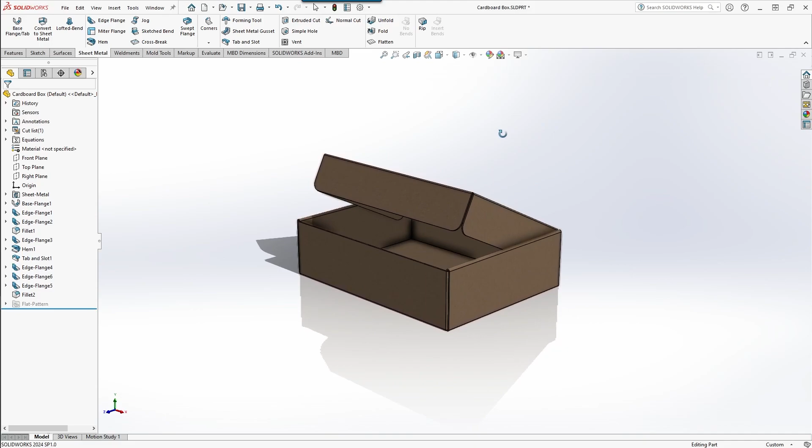As with any SolidWorks design, you have to start with your design intent. There are several definitions of what design intent is. In this case, I'm using design intent as the method of manufacture, to determine how we're going to design this box for manufacturing.

SolidWorks sheet metal feature allows you to flatten the pattern, and you can see exactly where I started. Everything stems from this rectangle right here. Now that's on this particular type of box.

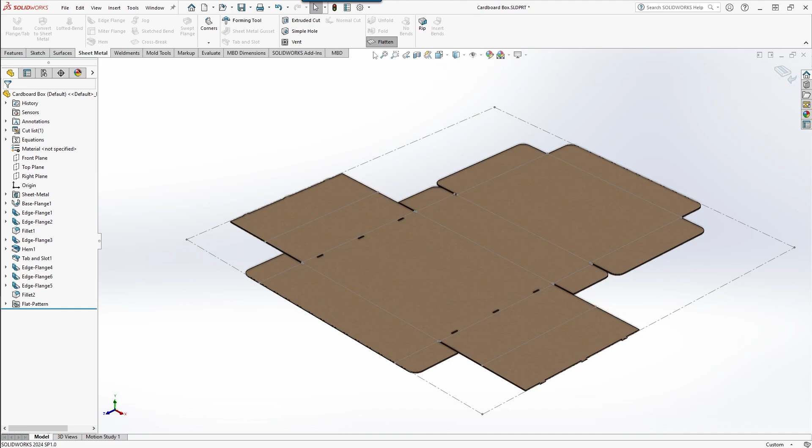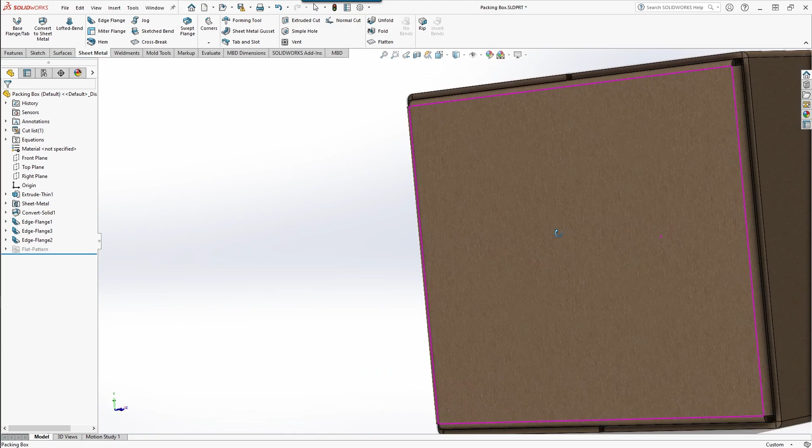On different cardboard boxes, there are obviously different ways for them to be manufactured. This box, when flattened out, doesn't start the same way because it's actually wrapped around, and this panel on this end is stapled over here to this piece. You can see that in the example here. When I turn this around, you can see where it folds in, and this normally gets stapled, with a couple staples on the side of the box. That can be for another video, but for this one we're going to be focusing on this box right here.

To start designing the cardboard box, the first thing we need is a base flange. In my case, I chose the top plane, and I started with this rectangular sketch.

After making the rectangular sketch, I went up to the Sheet Metal tab, clicked on Base Flange, and it gave me all of these extrusion features and sheet metal parameters. I overrode the default parameters and created my own, but these will be determined by your manufacturer or whoever the supplier is that's making the box, so you understand their box thicknesses and tolerances.

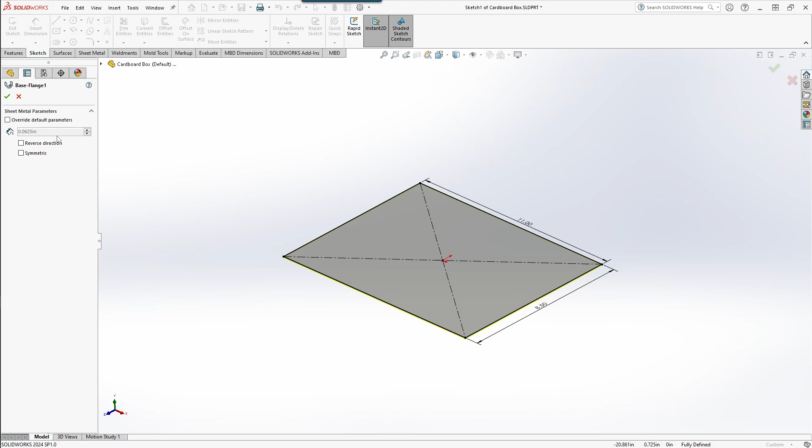After you create the base flange and it's extruded, you officially made your part into a sheet metal piece, and this gives you the ability to flatten it like I did at the end of the intro. After this is where we begin to create all of the flanges that come out from this base flange.

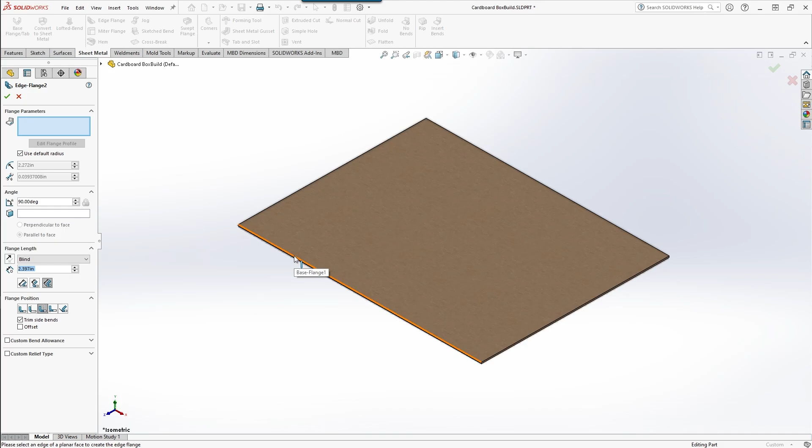The next step after creating the base flange is to create the edge flanges coming off of the side of the box. To do that, we go to Edge Flange under the Sheet Metal tab, select one of the sides, and choose the direction we want that flange to go in.

Now, as you can see, the bend on this is kind of ridiculous, so we're going to uncheck Use Default Radius and click 60 thousandths. Let's take a look at this down here. I'm going to hit Control 4 so we can get a better look at what these options actually do.

With the flange parameters, we have a couple of options here. First, I want to go to flange length because I want to adjust that to 3 inches. Now I'm going to zoom in a little here. Pay attention to the top of this. This will show us how the length of this flange is determined.

For the first option, it's going to determine the 3-inch length from a line drawn from the bottom here to an intersecting line to the outside of the actual flange, so that's what determines the 3 inches. Otherwise, if you click the central one, which I usually use, it's the 3 inches from the top of the radius we specified. And on the last one, it's from a tangent line.

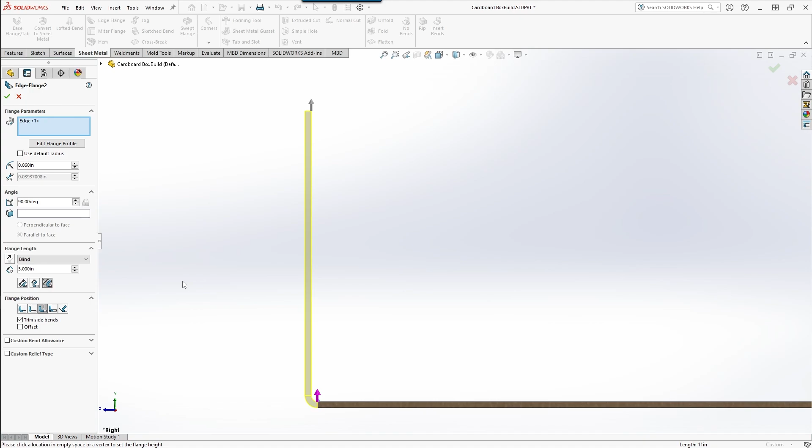This is handy when it comes to having angles greater than 90 degrees. Anytime you have a bend greater than 90 degrees, there's basically going to be a tangent line drawn along this curve, and that line is going to be perpendicular to this edge flange. The length is going to be from the top of this to wherever that imaginary line stems from on that tangent.

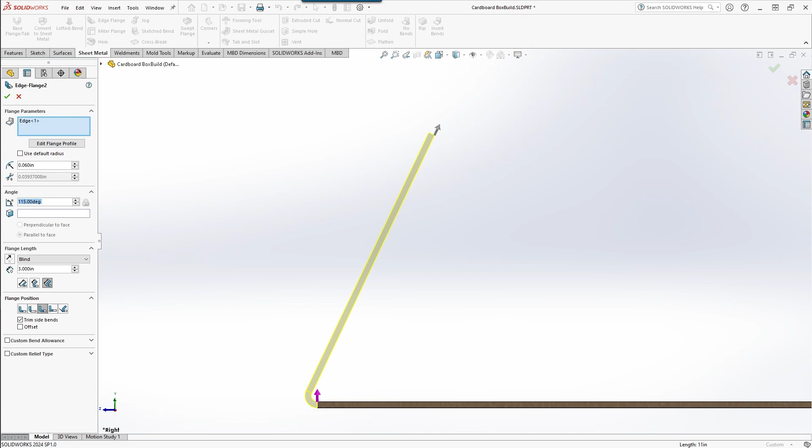Okay, so I'm going to go ahead and set this back to 90 degrees so we can start talking flange position. As you can see here, there's different areas that the flange can be positioned off of this base flange. I'm going to go left to right and explain what they are, except this one because I don't use it for this particular command.

So the first one is going to be the outside of the flange lines up to the base flange, which cuts into your base flange. The second option is to have the inside of that flange line up to the outside of the base flange, which also cuts into it. For our use here, I'm going to use the outside, which is the base flange is attached to the outer radius that we specified earlier.

Again, there's also the tangent radius to bend, which is the one that if you are using a bend that's greater than 90 degrees, it's going to create that tangent line, and that's going to help you determine the position of your actual flange. So in our case, I'm using both the radius and the flange.

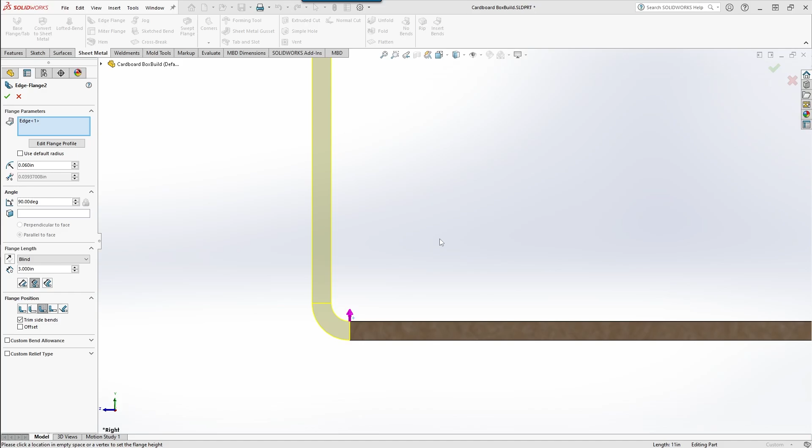Okay, so the next thing that we have to do is we have to apply this to the other 4 sides. So we'll go ahead and hit Control 7, which puts us in isometric view. Then we're going to go back up here and select the remaining edges. Since we already specified 3 inches earlier, all of these are going to be the same length. Go ahead and execute. And there you go. We have 4 flanges for the box.

Okay, so the next step is going to be to add some reinforcement flanges to the inside of the box. And what we're going to do is we're going to go back up to the edge flange again. We're going to go ahead and click an edge, point the direction. As we can see, the same thing happened with the radius, so we'll go ahead and click off default radius, add the radius we think is going to work, and then this is a point that's going to be able to display the inside-outside tangent bends that we talked about earlier.

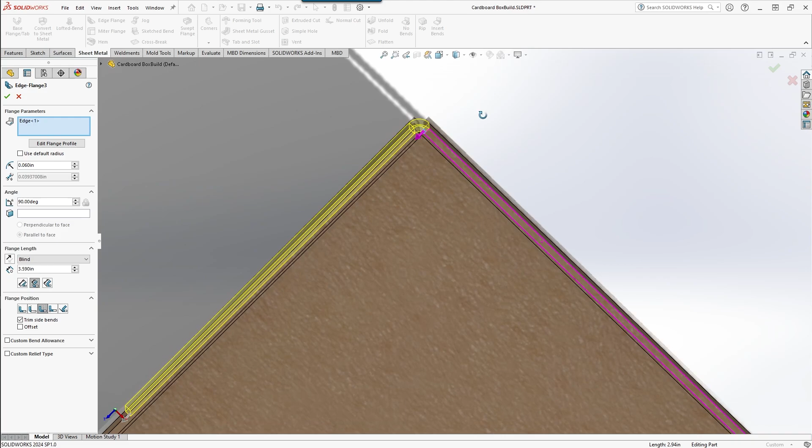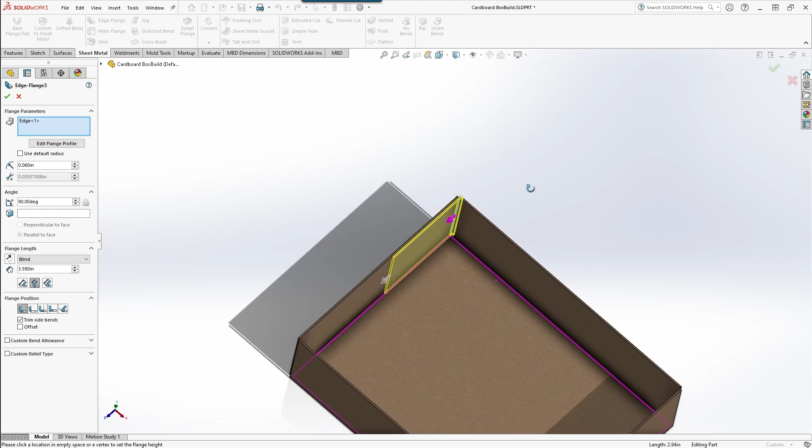So what we're going to do is we're going to put the flange position of this one on the interior, so that way you can see that it's being bent towards the inside of this and within this wall. So we want it to be contained. If we chose any of the other options, they would put it beyond this, so that wouldn't work out for us. So we're going to use that option for the flange position, and then we're going to go ahead and select the other 4 edges here.

3, and here's the last one. And then I'm going to go ahead and put a length of 2.5 inches. And what these are going to do is they're going to reinforce the inside of the box for us. So now we have all 4. They're the same length. Go ahead and execute those.

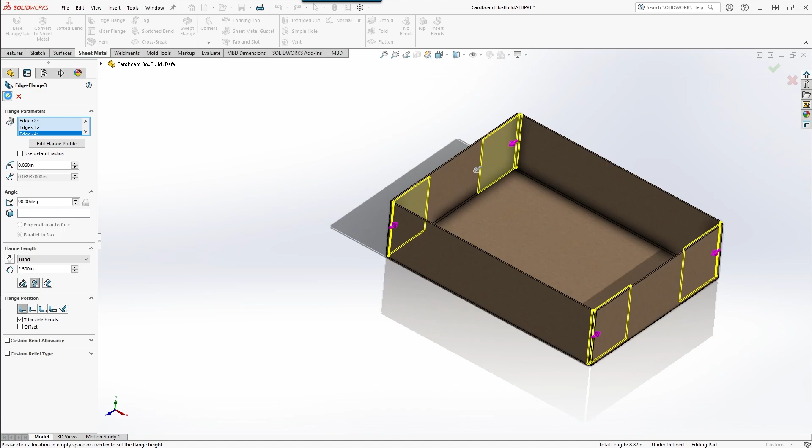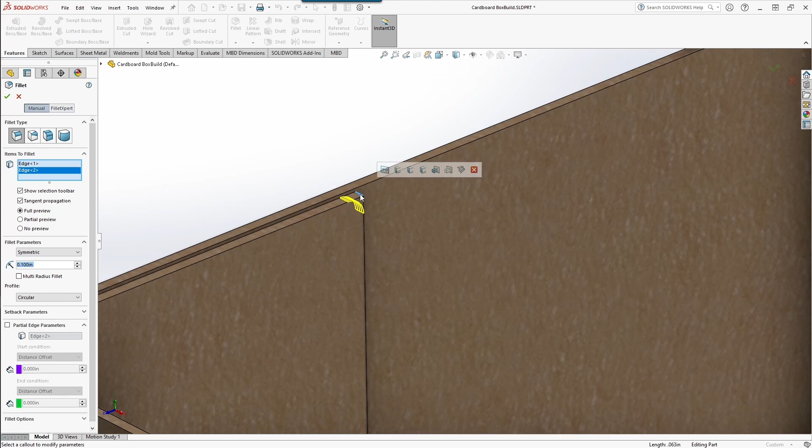Okay, the next step that I have in the cardboard box is the radius that I added to each one of these flanges. So that's a regular feature. Go ahead and fillet. Click on the edge. Click on the edge. Click on the edge, and click on the edge again.

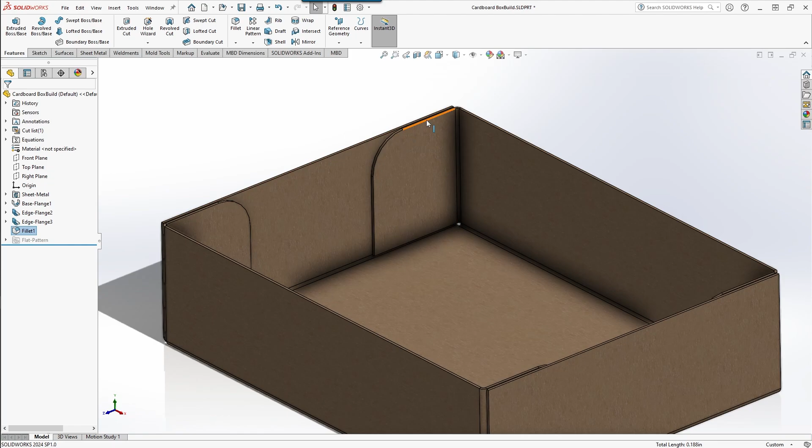Now I'm going to make this a generous fillet. Now this can be a design aesthetic, but it really doesn't serve anything as far as the structural integrity of the box. Again, this is a design element. This still creates a structure that's going to reinforce the next step.

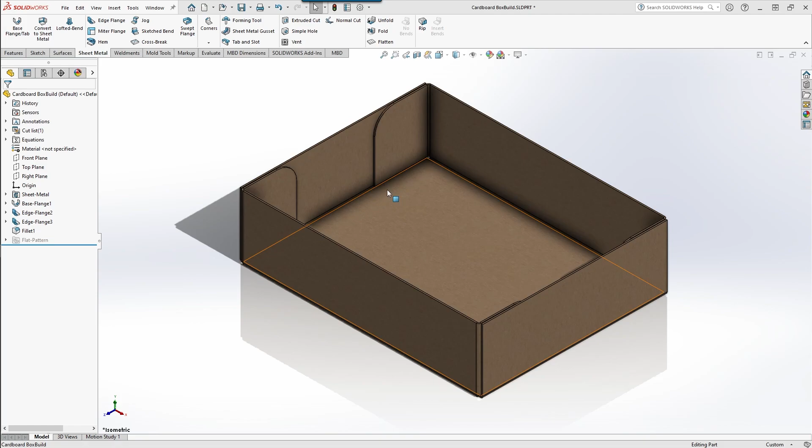So earlier I used the flange position to be outside of the base flange and include the radius. Now the reason why I did that is because of the fact that the next step requires us to create a hem, and that hem is basically going to create a rolled edge that's going to come over and into the box. And then ultimately what we're going to want to do is put some holes in the bottom and some tabs in this closure so that it locks into the box, and that way it won't come open, and we have the reinforcement from the inside edges.

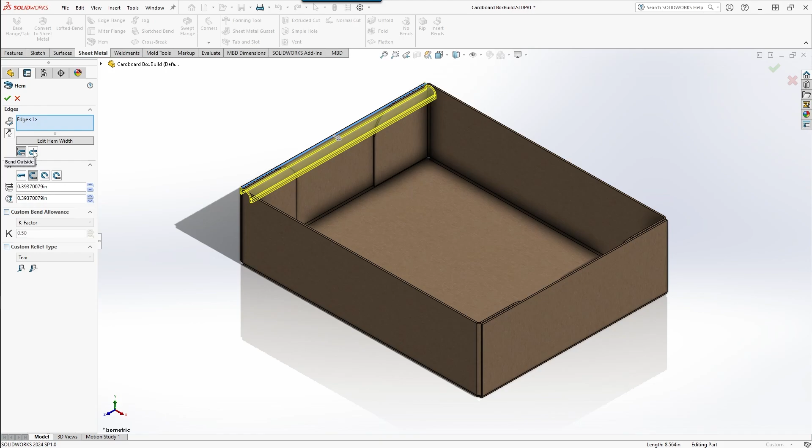Okay, so let's go ahead and create that hem. Go up to the sheet metal tab, click the hem tool, and select our first one, then we have the direction specified from there. There's a couple options on this one, just like on the flanges. Let's go ahead and hit Control 1 so we can go into the side view here.

So we have the material inside, which means the edge of that roll is going to be at the top of the flange, or you have it above, just like the flange material. Then we have different types and sizes here. We're only going to focus on the first two. The first one is closed, which is basically a crease, so the box folds in on top of itself. Depending on your design, you could use it, maybe not.

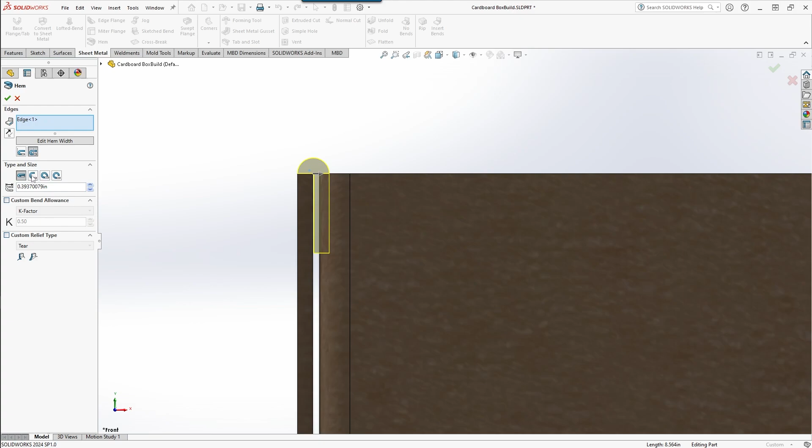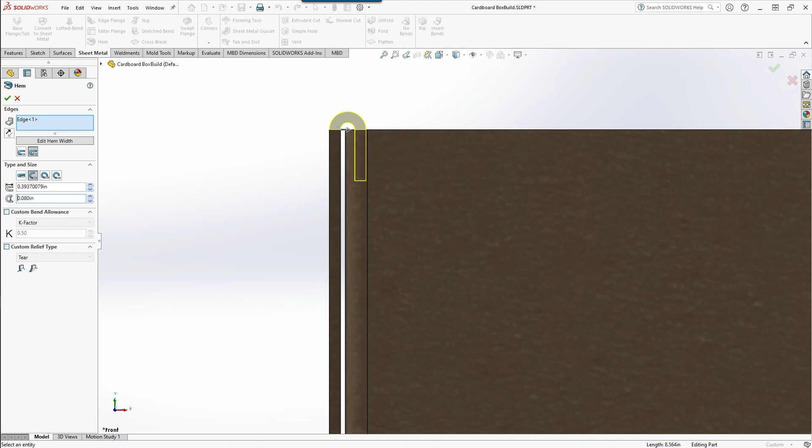The most common one that we're going to end up using is the regular curve tool, the open one, because we need it to go above this piece and then sit inside all the way down to the bottom here. So how we do that is we go ahead and put the parameter here. Let's go 80 thousandths, for example. And then we'll notice in our design that there's a bigger gap than 80 thousandths will allow.

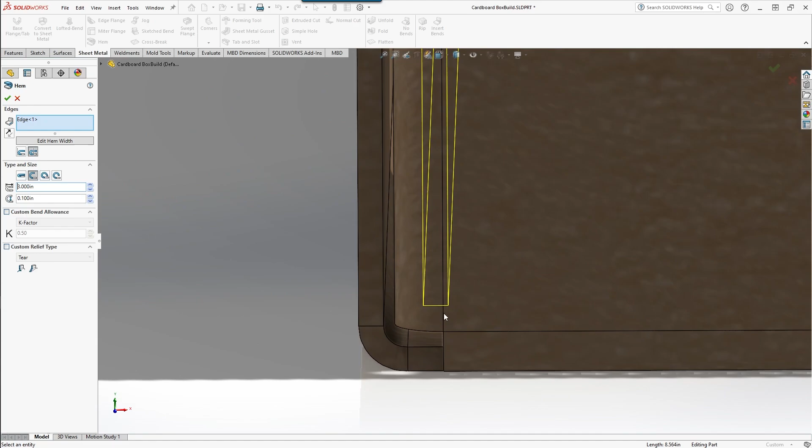That's on the inside, so I'm going to make that a little bigger. I'll put it to 100 thousandths, and then increase this to 3.1 inches just like we had before. Then we can take a look at the bottom, Control 1 again, and we can see that comes up a little short, so I'll just go ahead and notch it 100 thousandths, and that's close enough.

What that's going to do is create the hem that comes over these, and the next step will be to add the tabs and slots to the bottom of the box so that we can lock it in place.

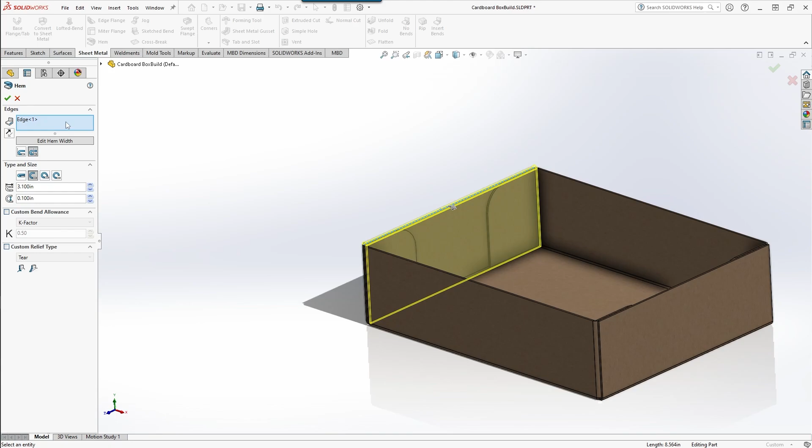Go back up here to the edges and select the other side as well, because we have two of these that we need, and then switch the direction if it's the wrong way. The arrows help you manipulate that, so left and right will allow you to do that, and now we have two hems that fold into the box.

Okay, so now that we've created our hems, let's go ahead and add the tab and slot into it. In the sheet metal tab, go ahead and click the tab and slot command. Now this might be overwhelming at first, but it's really not that complicated once you actually get down and do it, so I'll walk you through it very carefully here, step by step.

First things first, we got to click the edge that we want to put the actual tabs on. That's going to be the bottom of our hem. Then we're going to go ahead and click the surface that we want it to pierce. So if you turn it over, we want this face because we want those tabs to pierce in.

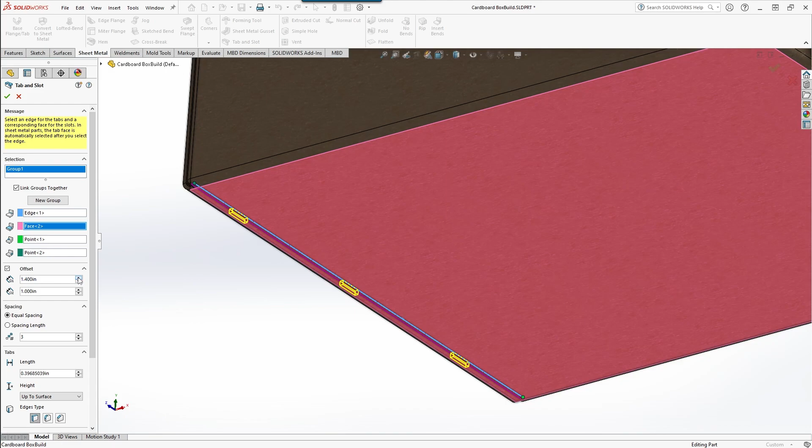Now, the offset tab lets you determine how far in from the edge you'd like them to move, so I'll show you how that works here. Distance 2, if you want to make them equal and move them in further, so those determine the offset from the edges. Then we want equal spacing because we want to make sure we have X number of slots. Three is a good number, or you can use two—either one of those works.

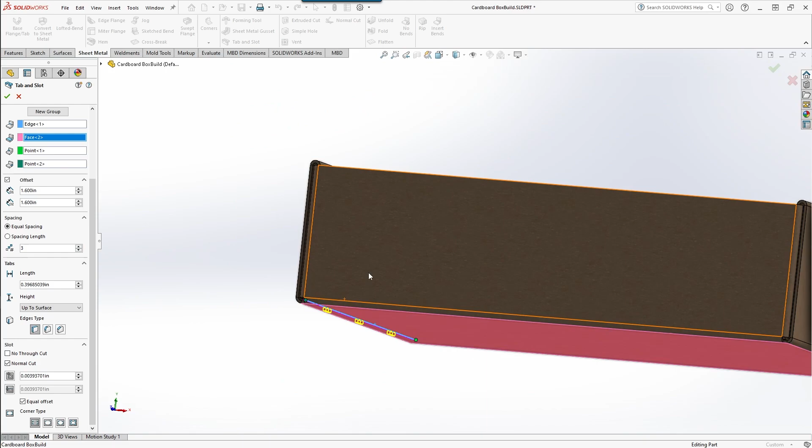The length will determine how long the slots are and whether or not they go all the way through and pierce through the piece, or if they will actually be longer than that. So you can determine that with this.

And then you also have height suggestions here. So you can do it blind, which will determine the length beyond it, up to surface, which is what we were aiming for, and then offset from surface, which will send it backward from this surface.

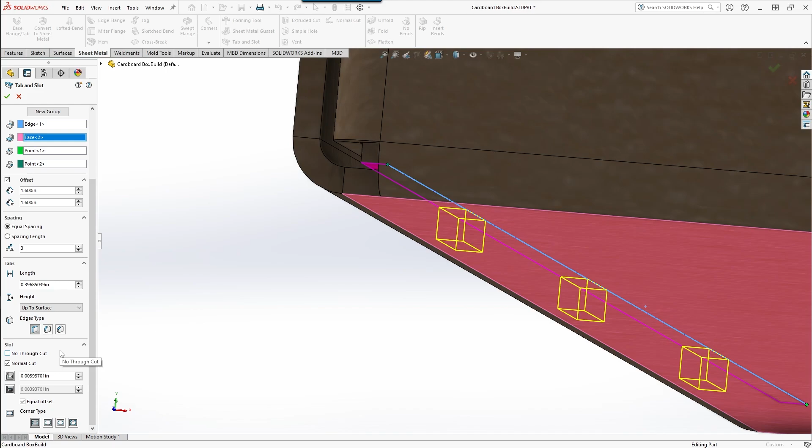And then another cool feature here that I realized not too long ago is that you could actually create radiused edges on these, or you can create beveled edges on these, and then straight edges. For the sake of this example, we'll go ahead and use the beveled edges.

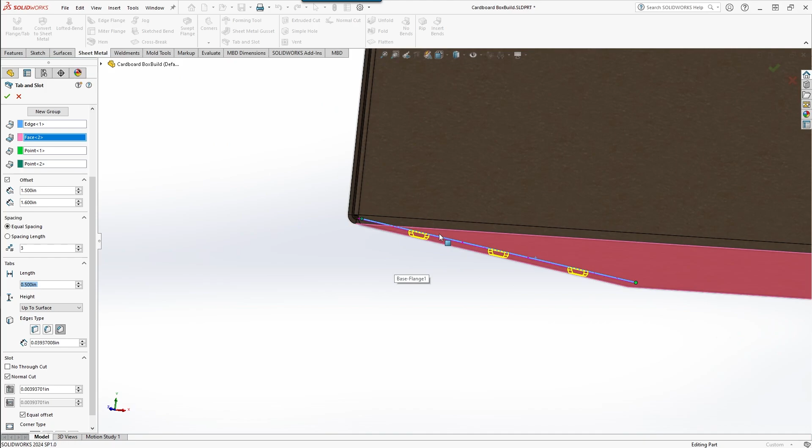And then I also think I want to increase the length of the tabs. I'm going to make them 0.5 inches just so that we have a nice solid length for those.

And then you can create a second group for these, so hit new group and do the same thing on the other side. Click the lines and basically repeat the process.

And we've linked the groups together by clicking this button right here, but if you unclick them, you can give it special parameters to whatever new group you add.

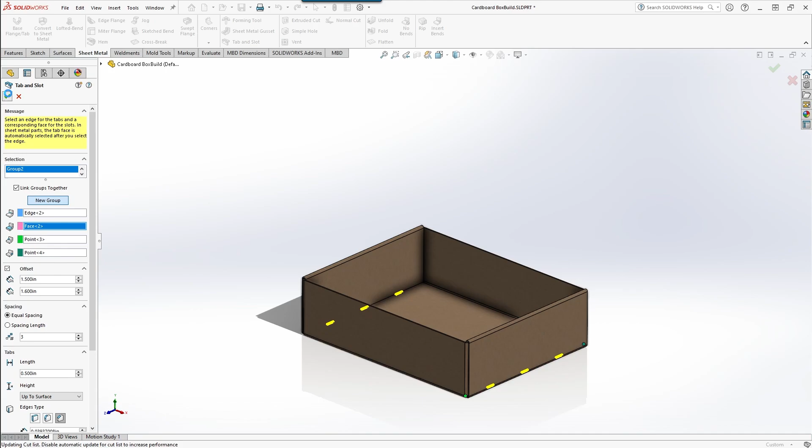So in this case, we're actually done. So we'll go ahead and hit the execute command, and we'll go take a look at what we've done. If you look at the bottom here, we have some slots, we have some tabs, and the process is complete.

Okay, next we're going to put the lid on the box, and what we're going to do is the same thing we did on the sides. We're going to use the edge flange.

We're going to do it a little differently than we did those sides though, because there's a couple more things that we have to do to make sure that the constraints are right on this one.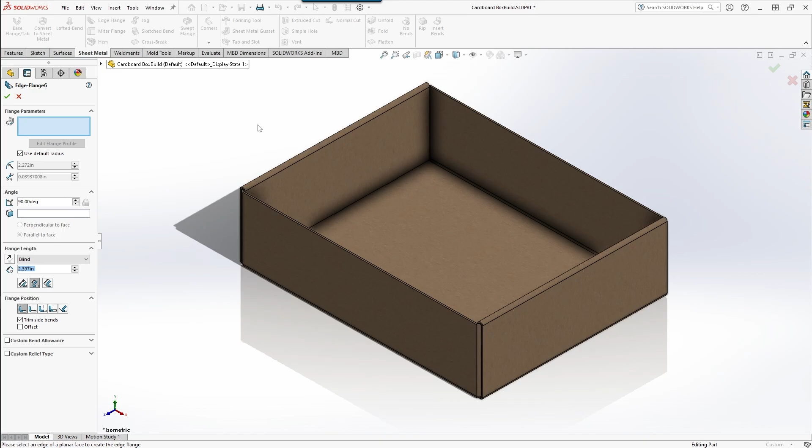So first things first, we'll click on the edge, give it the direction as we did previously, unlock the default radius, add our own.

Okay, and then what we're going to do on the flange length is we're going to go up to vertex. So up to vertex allows us to click on the hem, and that's where it's going to stop the box.

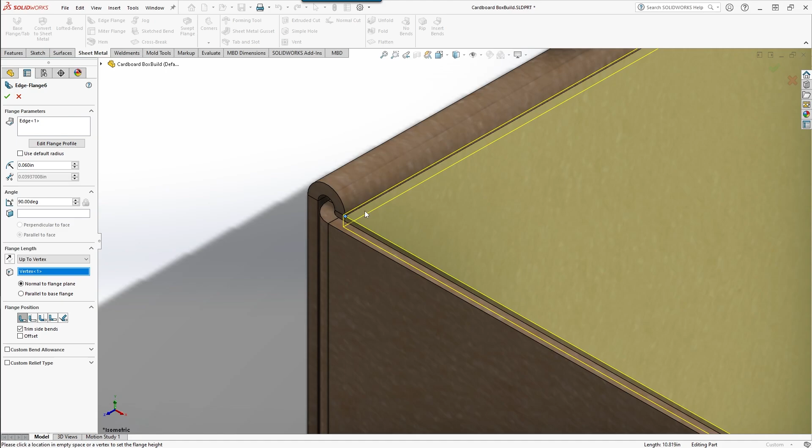So this is handy because if we decide to change the length and width of the box, this lid will always be covering to the edge of that hem. So that's kind of nice to have as a feature.

Now, one thing we do have to pay attention to, Control 5 to get it to the top view, but we'll notice here that the hem that we created earlier is overlapping the lid, and we don't want that.

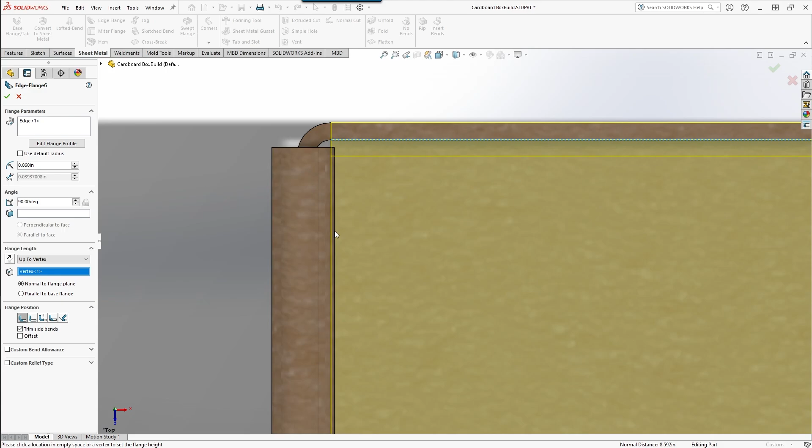So we're going to go ahead and hit Edit Flange Profile. And then what you can do here is you can take that sketch and move it inward. Obviously, we're not going to do it that way.

We'll go ahead and constrain it from that flange base edge to the lid. Go ahead and do 50 thousandths so we can have some clearance, and we're going to do the same thing on this side as well.

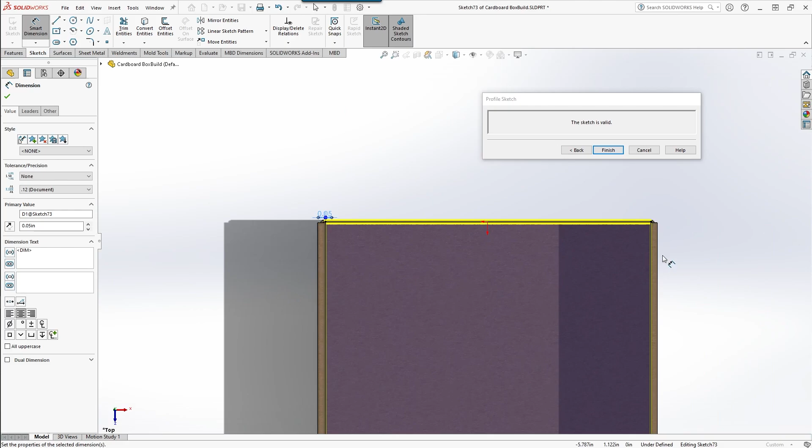We'll go ahead and move this in. Go ahead and smart dimension it to this.

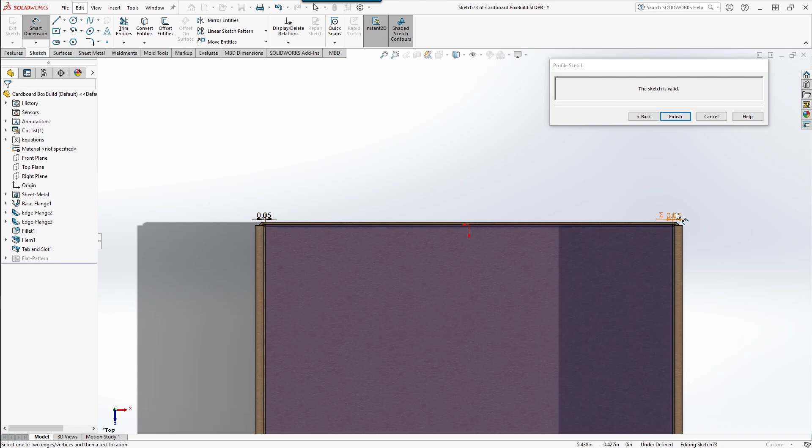Now what I want to do here is I want to hit equal, and then we can go ahead to the first dimension, click on it, and it'll be the same dimension every time. So now these are linked, so every time that you change this dimension, this one will automatically update with it.

50 thousandths should be good, so we'll go ahead and click finish. See how we did.

Okay, now if we look at the box, we do see a little bit of a problem, because that means that the lid is coming below the hem that we created, and that doesn't look very good because from the back we had to cut into it.

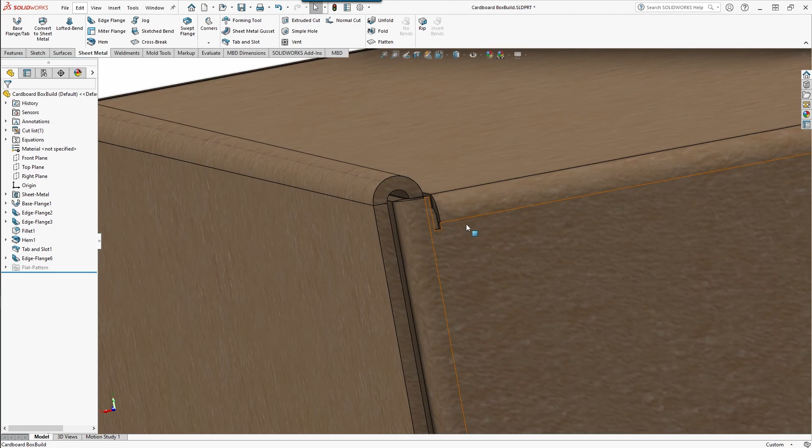Why that happened? Well, let's go ahead and investigate, because I have a feeling I know. Go ahead into the edge flange, and then take a look at the flange position that we used.

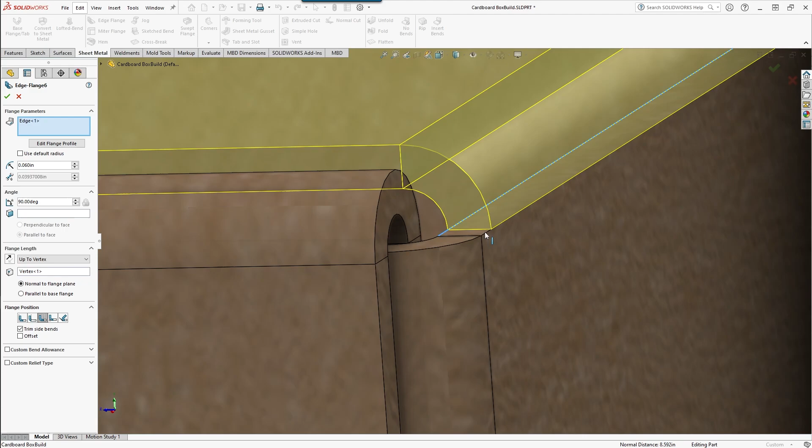So we'll go ahead and use that one. Had we used the other two, it would have created those notches on the side of those cutouts, and we would have had a not so great looking box.

So let's go ahead and complete that. Control 7 for the ISO view.

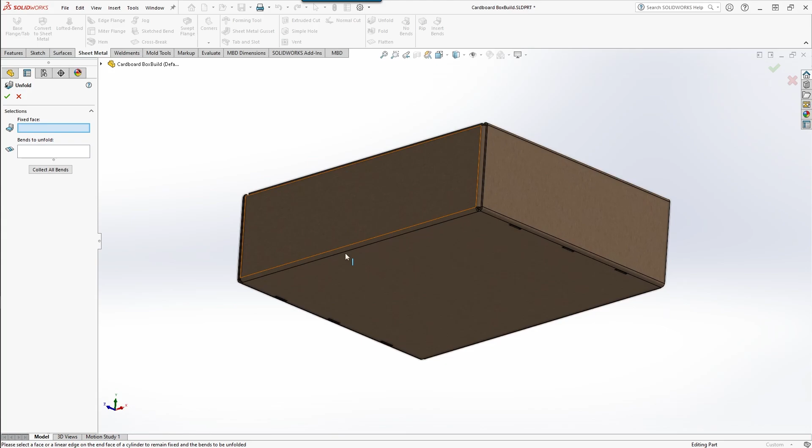Okay, so there's a couple of different ways that we can do this next part. Since we need the interior open to have visibility inside the box for the next flanges we have to create, I'm going to use the unfold command. The fixed face I'll use is the bottom, and the bend I want to unfold is this front one. We'll go ahead and execute, and as you can see, it unfolded the box so we can see inside. We could have used section views to get all the edges we're trying to complete, but I'd rather just unfold the front and use it the way it is.

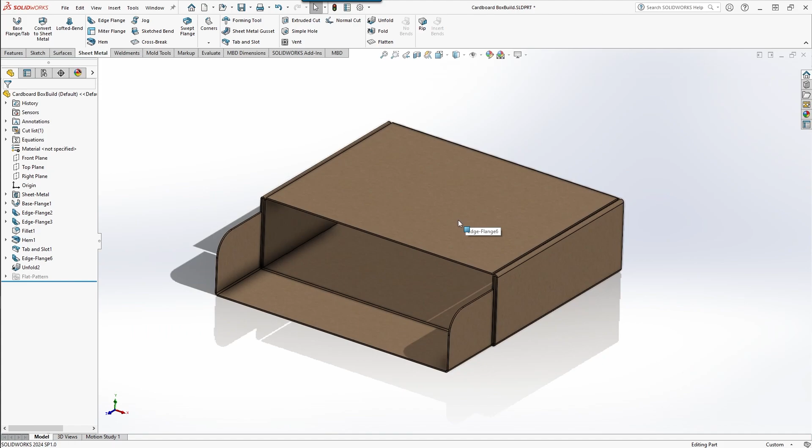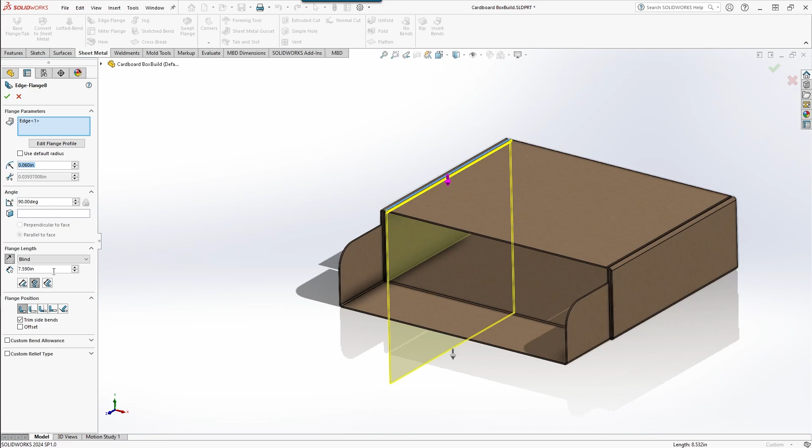So we'll go ahead and do the edge flange. We'll select the flange out here on the side when it lets me, and do it down as usual. Untick default radius and put our own. For the flange length, we'll hit up to vertex and match it to the hem down here that we already made. Click back over to the edges and select the second edge so we have both of them in there.

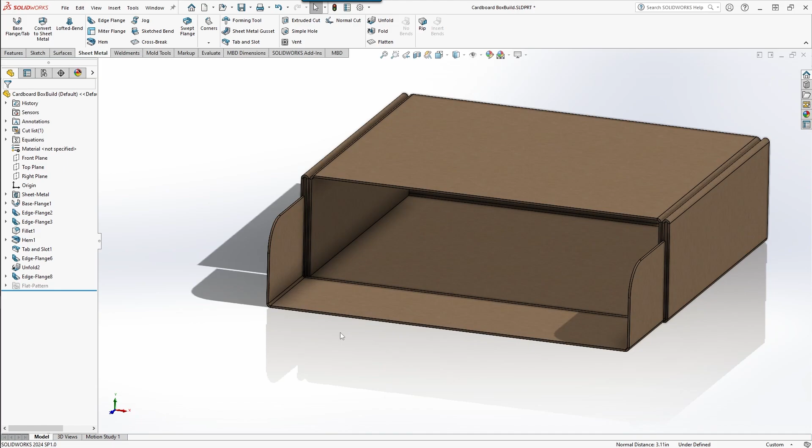Go ahead and execute. We do have this edge open now, but we can do one of two things: keep it and fold it back up using the fold command, or just delete it since the feature we just created isn't dependent on it. So we'll go ahead and delete it. Control 7 for ISO view.

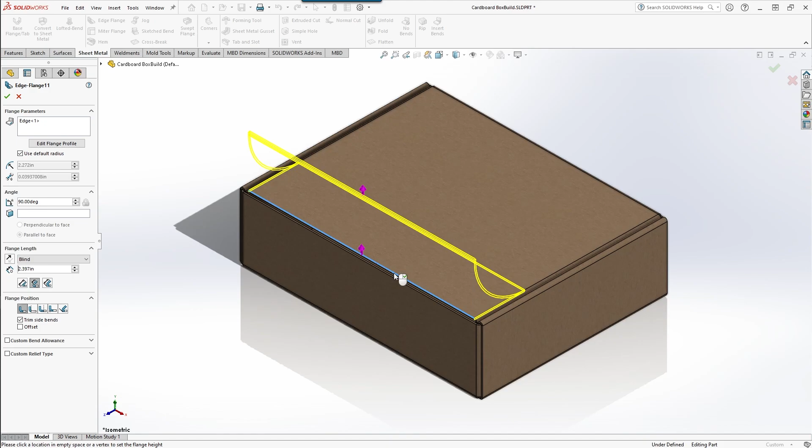To finish off the cardboard box, we're going to create this front flange. Now we're going to do this without using the unfold command like I did previously, and see what the difference is. So hit edge flange, click that front edge, define your direction, unclick your radius for default, and then we're going to do up to vertex again. We'll zoom in, click on the bottom, and use the vertex on the bottom of our hem here as our constraint.

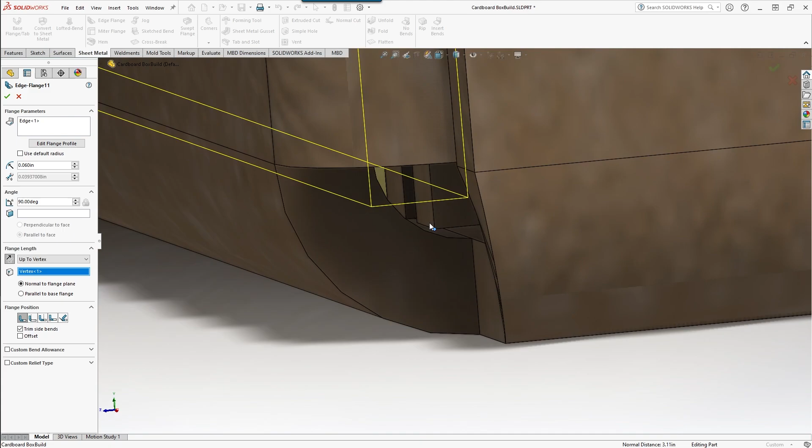Now, with the unfold command, you probably have a better idea of the interference that could be happening within the box. But luckily for us, SolidWorks also has a great detection system in sheet metal that tells us whether or not there is any interference within the pieces. So we'll go ahead and click this out, and it looks good, but I do want to point out one thing.

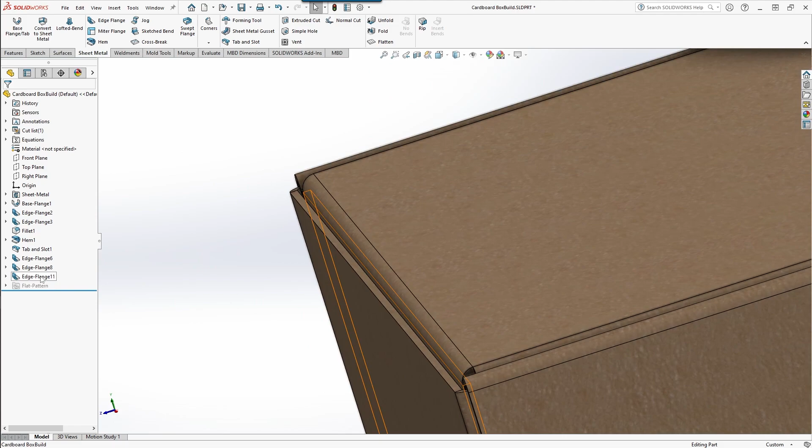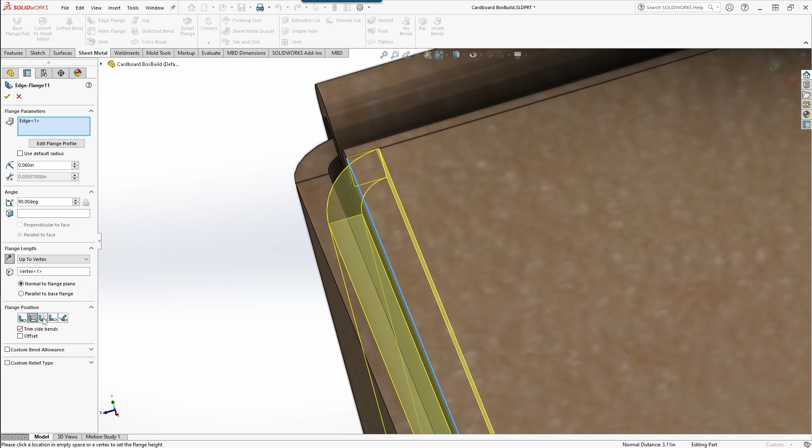Go back to Edge Flange, right click, and hit Edit Feature. I want to point out that this is one of the first times we've used it where the flange position is not outside of the actual flange edge we selected. In this case, we wanted it to be with the material on the inside so it didn't interfere with anything else as far as the front edge of the box. If we would have clicked this one instead, it would hit interference. Just so you can see it, if you click off on it, you'll get a warning telling you it's essentially intersecting itself.

So we'll go ahead and click Edit Feature, go back to Material Inside, execute, Control 7, and we are all set. And that is how you build a cardboard box using the sheet metal features in SolidWorks.